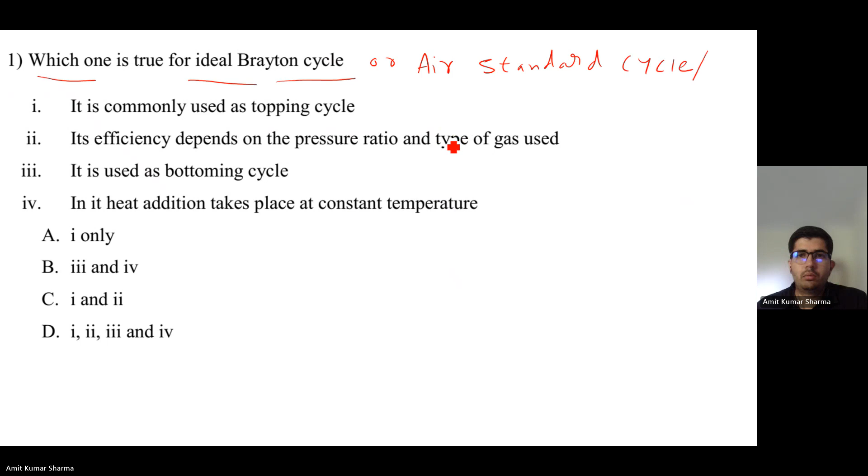The ideal Brayton cycle is also called the air standard cycle or Joule cycle. Maybe based on this you can recall it. Try to go through all the options. Try to remember the T-S diagram of the ideal Brayton cycle and in what way we can use it.

Okay, let's start with the solution. The correct option is option C, so the first and second statements are correct. The first statement is that it is commonly used as a topping cycle. Yes, it's commonly used as a topping cycle because in the ideal Brayton cycle, it's a topping cycle. The waste heat, that is the heat rejected, we use in some bottoming cycle to produce power. Like in a combined cycle, we can use gas and steam turbine combined cycle. The gas turbine cycle will be based on the ideal Brayton cycle, and the exhaust heat from the Brayton cycle will be used to generate steam, and that steam will be used in the steam cycle or Rankine cycle. So directly from the definition or basic concept, we know that the ideal Brayton cycle is commonly used as a topping cycle.

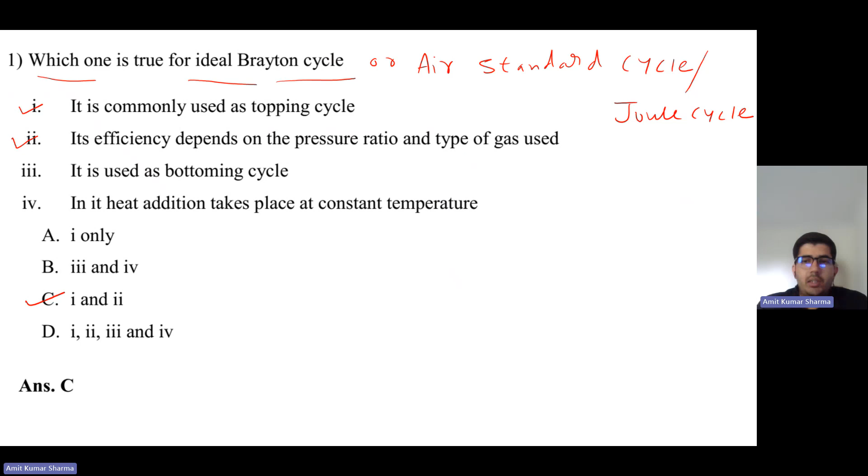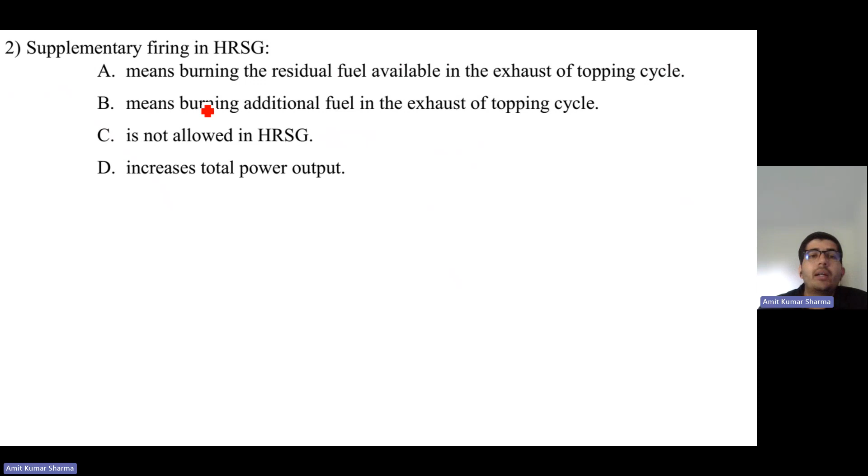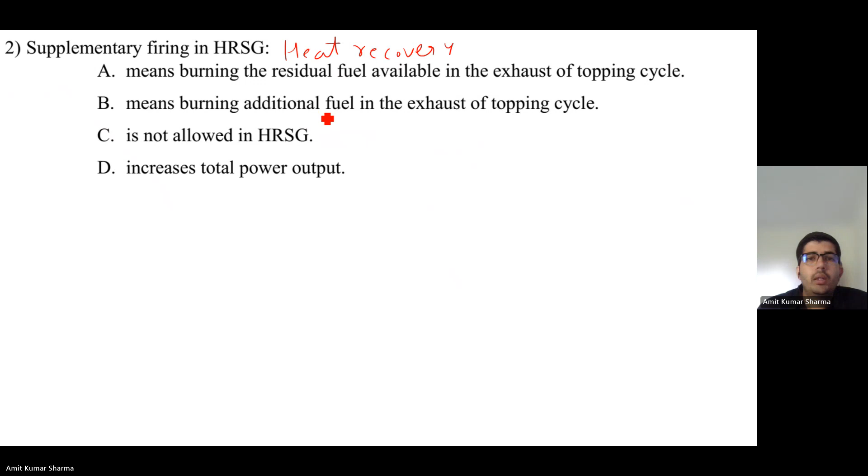Let's come to question number 2: supplementary firing in HRSG. HRSG stands for heat recovery steam generator. Let's write the full form - heat recovery steam generator.

What does supplementary firing in HRSG mean? We have four options. Option A means burning the residual fuel available in the exhaust of the topping cycle, option B means burning additional fuel in the exhaust of the topping cycle. Option C says it is not allowed in HRSG, and option D says it increases total power output. We have to select which options are correct for HRSG. Take 2 minutes and try to answer.

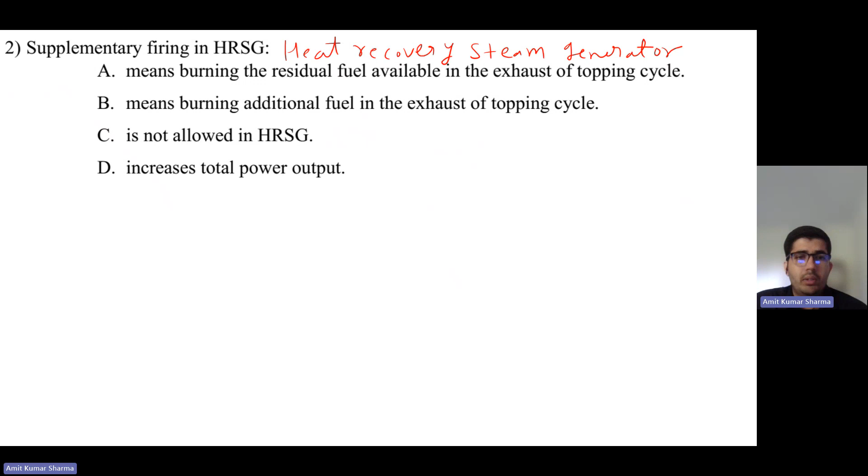Now let's come to option C, which says it is not allowed in HRSG. No, that is not the case, because supplementary firing is allowed in the heat recovery steam generator, since it is essential if we want more power output. Suppose the topping cycle exhaust heat is not sufficient to run the bottoming cycle properly - then we need some supplementary firing, so it is allowed. And supplementary firing in HRSG increases total power output, so D also seems correct.

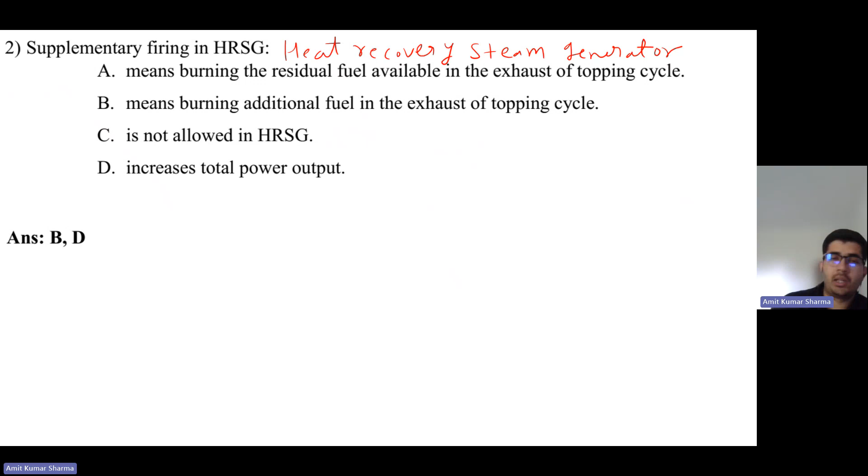So the correct options are B and D. Supplementary firing in HRSG means burning additional fuel in the exhaust of the topping cycle, and it increases total power output.

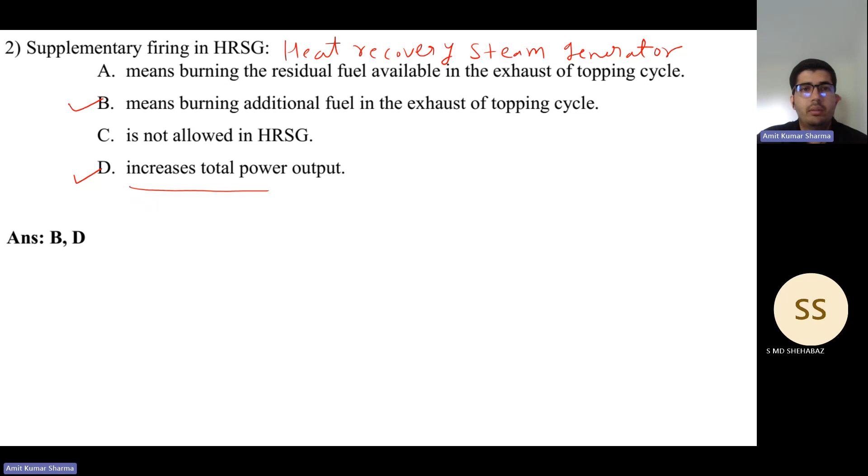I think someone has joined the session. Are you able to see the slides and can you hear my voice? Yes sir, I'm able to hear you. Okay, everything is coming through fine. I think today it's only you and me - maybe, let's see. I think it's a rescheduled session, so maybe others forgot to join.

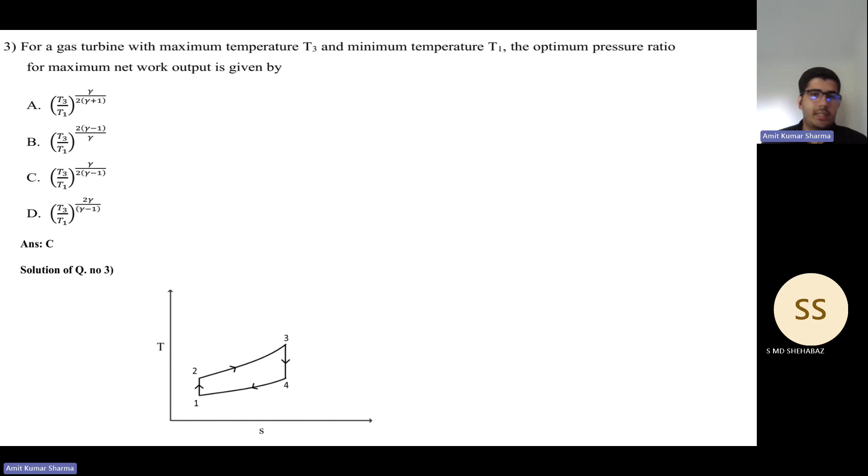So let's see, first we should draw the TS diagram. So the TS diagram we can draw here, you can see it. The process goes 1 to 2, 2 to 3, 3 to 4, and 4 to 1. T1 is the minimum temperature and T3 is the maximum temperature. Now we have to find the maximum work output.

So for the ideal Brayton cycle, the pressure ratio Rp is given by Rp to the power gamma minus 1 upon gamma equals to T2 upon T1, equals to T3 upon T4.

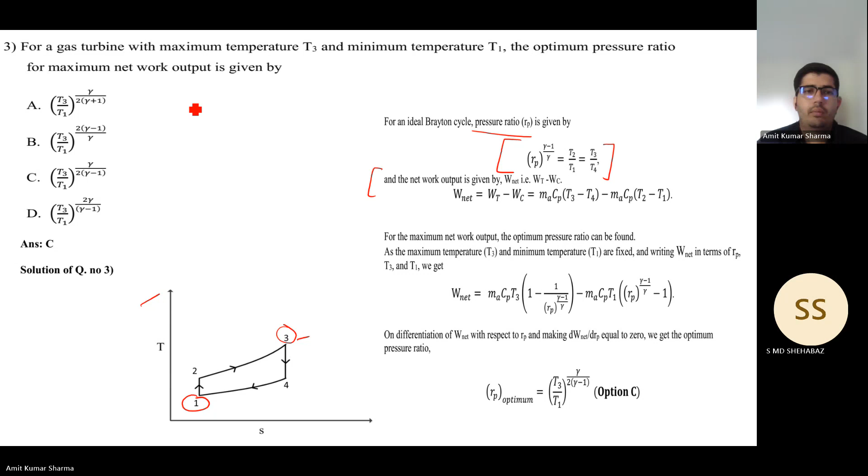So the net work output, W net, is W turbine minus W compressor. In the Brayton cycle, the compressor has a significant work input because we are compressing the air. Earlier in steam turbines we used pumps, which didn't require much work, so for ease of calculation we sometimes neglected that work. But in actual gas turbines, we have to consider the compressor work also. So the net work will be W turbine minus W compressor.

So WT minus WC. For WT: mass flow rate of air (MA), specific heat CP, and T3 minus T4. So W turbine will be MA CP (T3 minus T4), minus for compressor it will be MA CP (T2 minus T1). So this will be the formula for the net work output.

Now we are given that we have to find the maximum net work output. For maximum, we can apply some conditions. For the maximum net work output, the optimum pressure ratio can be found as the maximum temperature T3 and minimum temperature T1 are fixed. So we have fixed T3 and T1, and now we have to write W net in terms of Rp, T3 and T1. So we have to replace T2 and T4.

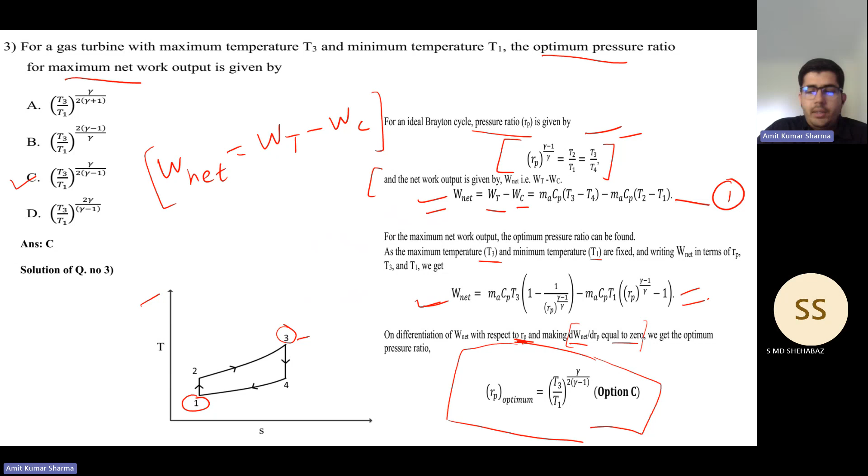Okay, let's come to question number 4. The efficiency of topping and bottoming cycle of a combined cycle power plant are eta1 and eta2 respectively. The correct expression of efficiency for the combined cycle is asked for. Maybe more than one option can be correct. Try to remember the class notes and try to answer this question.

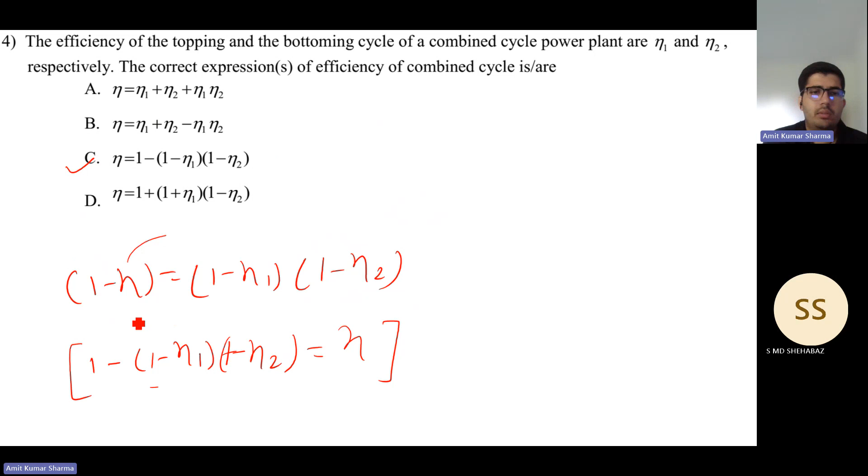So this will be the efficiency of a combined cycle. Check the options, and we can find option C has a similar term, so it's correct. Now again try to solve these two terms, then we can find out.

So that eta will be 1 minus a larger bracket. I multiply this 1 to 1 and 1 to eta 2, and this eta 1 to 1 and again eta 1 to eta 2. So we will get 1 minus eta 2 minus eta 1 and plus eta 1 eta 2.

So again solve the bracket. Outside we are having a minus sign, so if you change the signs inside, it will be 1 minus 1 plus eta 2 plus eta 1 minus eta 1 eta 2. So this will cancel out, and the efficiency will be eta 1 plus eta 2 minus eta 1 and eta 2.

You can check with the options. We can find the similar term in option number B, so B is correct. So the correct options will be option B and C.

So the efficiency of the topping and bottoming cycle of a combined cycle power plant, having efficiencies of eta 1 and eta 2, can be represented as a single efficiency like 1 minus eta 1 into 1 minus eta 2, and eta 1 plus eta 2 minus eta 1 eta 2. Option B and C are correct.

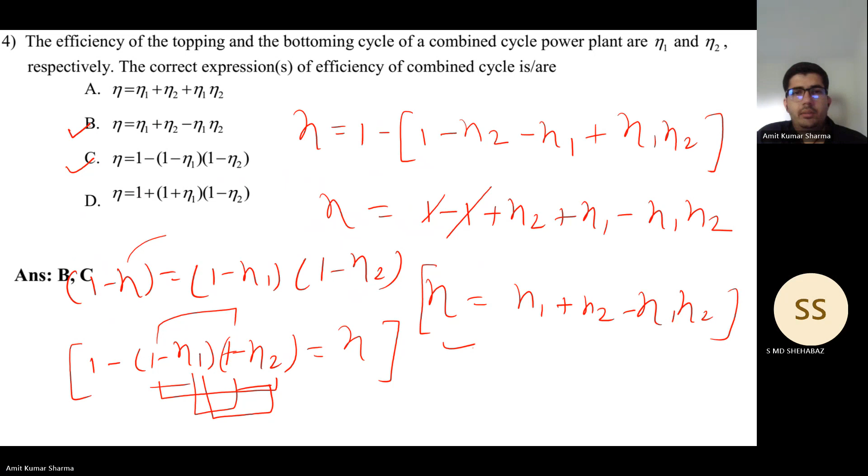Okay, let's come to the next question. Question number 5: in a gas turbine, the atmospheric air is compressed to 6 atmosphere. The maximum and minimum cycle temperatures are 1200 Kelvin and 300 Kelvin. So T3 and T1 are given. Find the ratio of the gas turbine cycle efficiency to the Carnot cycle efficiency.

We have to find out the gas turbine efficiency and the ratio of gas turbine efficiency and Carnot cycle efficiency. I think you can easily calculate the Carnot efficiency since you know the maximum and minimum temperature. The ambient is at 1 atmosphere and 300 Kelvin, so the ambient condition is given, and gamma is also given. Now find the gas turbine efficiency and the Carnot efficiency, then find the ratio. So take 3 minutes to solve this question and then we will discuss.

Try to recall the formulas, then I think you will be able to answer it.

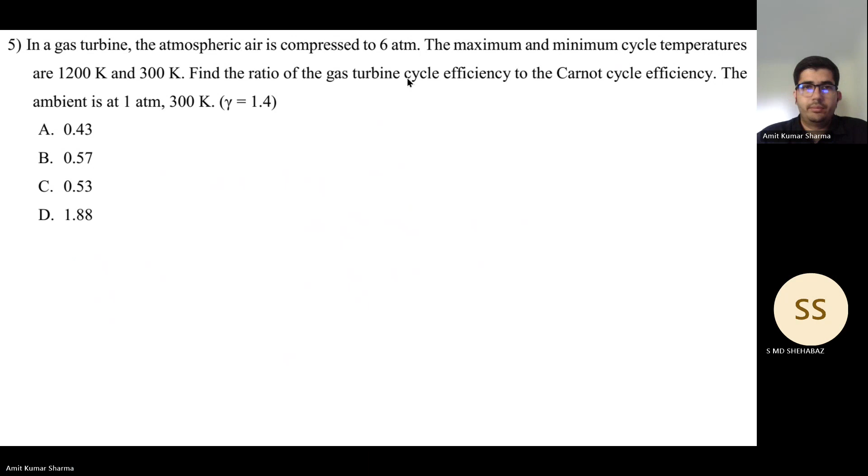Okay, so let's start with the solution. As we can see, the Carnot efficiency is 1 minus T min upon T max. We have given the T minimum and maximum temperatures, so the Carnot efficiency will be...

1 minus T minimum, which is 300 as given in the question, and T max is 1200. So 1 minus 300 upon 1200, you will get 0.75, you can say 75%.

So this will be the Carnot efficiency. Now the Brayton cycle efficiency, as we also know the formula: 1 minus 1 upon Rp to the power gamma minus 1 upon gamma, where Rp is the compression ratio, and Rp will be P2 upon P1. We are given the maximum pressure is 6 atmosphere from the ambient 1 atmosphere.

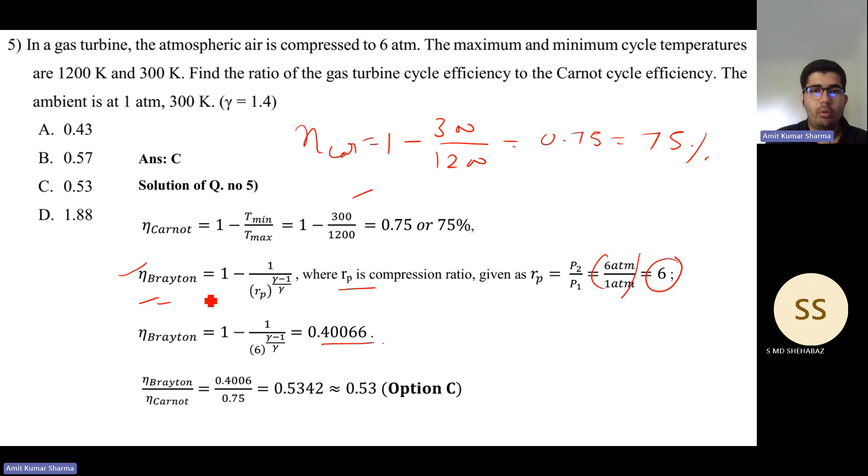So the question asked for the ratio of Brayton cycle and Carnot cycle efficiency. Now we know both efficiencies, so we can easily find the ratio: 0.40066 upon 0.75. After solving, it comes to 0.5342, which is approximately equal to 0.53.

So the correct answer is option C. Try to remember this formula, because every time it will be difficult to derive these formulas. So try to understand it and remember it — it will be easy for you to solve the numericals then.

Any doubt? Okay, let's come to the next question.

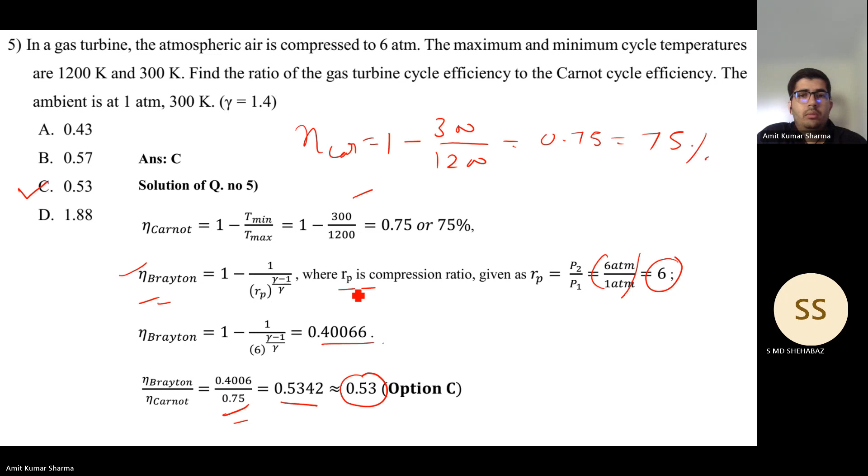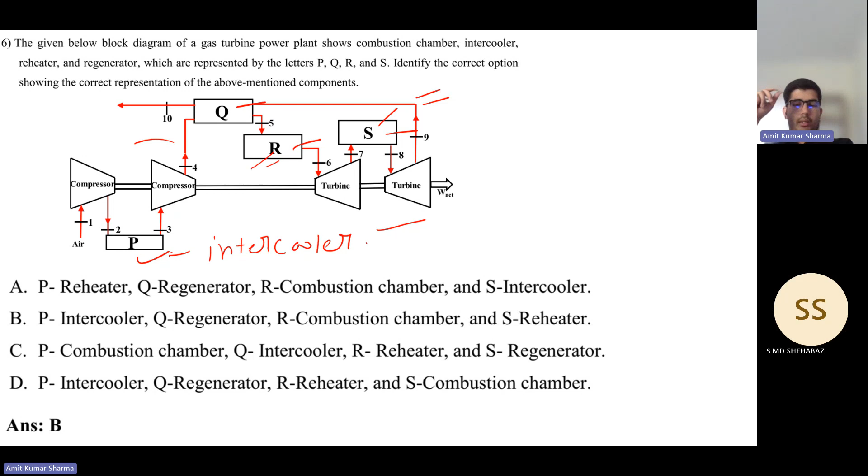Okay, let's go to the next question.

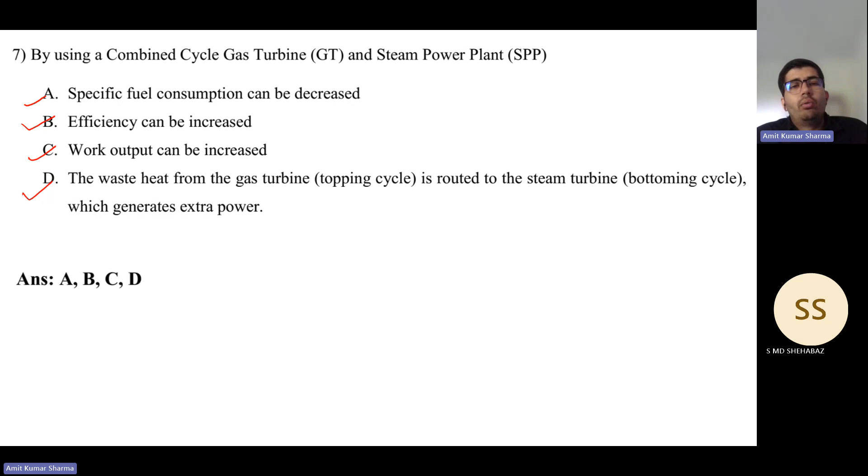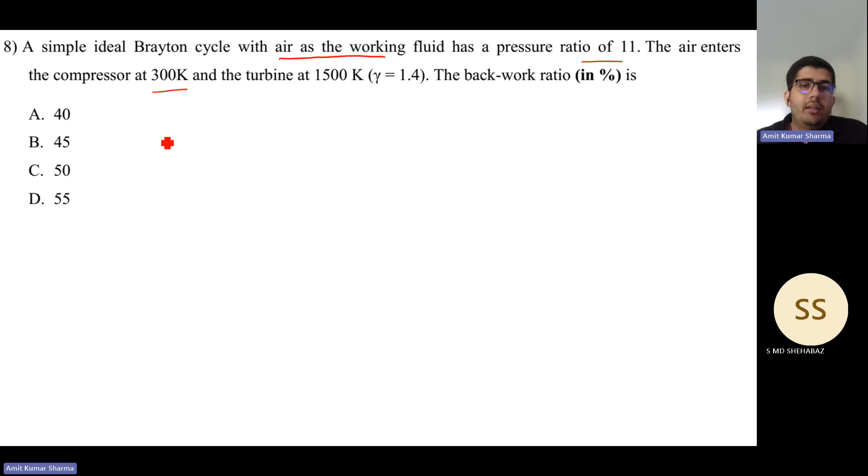Let's come to the next question. A simple ideal Brayton cycle with air as the working fluid has a pressure ratio of 11. The air enters the compressor at 300 Kelvin and the turbine at 1500 Kelvin, and gamma equals 1.4. Find the back work ratio in percentage.

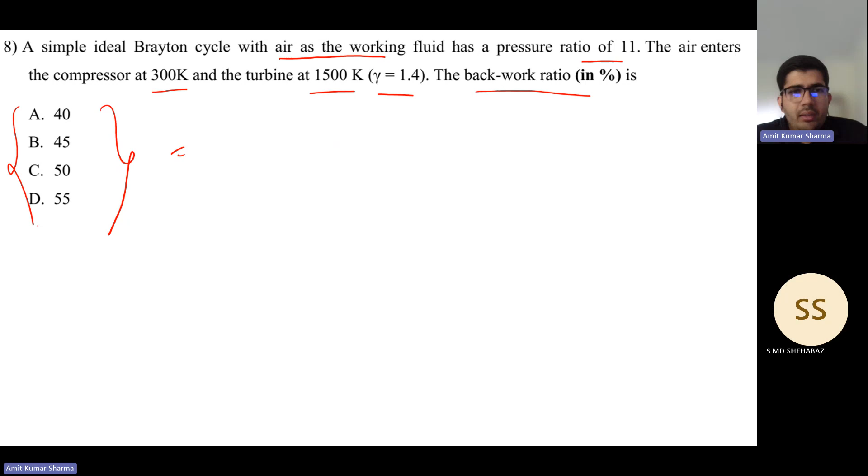Take 2 to 3 minutes and try to answer this question. Just try to recall the basics of a Brayton cycle. Make a basic schematic, mark all the points 1, 2, 3, and 4, and try to put in these values. After that, maybe you will be able to calculate it.

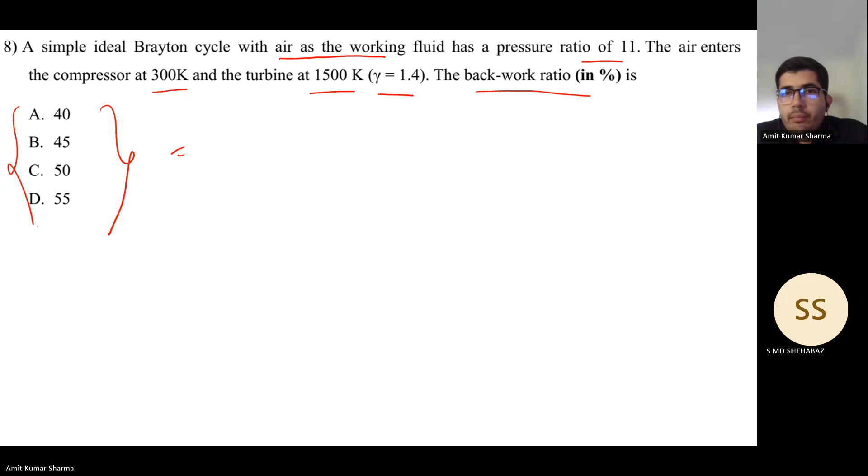So try to solve this. Do we have any answer? Okay, so first of all, whenever you have a problem based on any cycle, like Brayton cycle, Rankine cycle, any cycle, the best thing to start the solution is with a basic schematic of a TS diagram or HS diagram. So here we can draw a TS diagram.

So we have to mark the points 1, 2, 3, and 4. In this way you can see 1, 2, 3, and 4. Now, we have given that the working fluid has a pressure ratio of 11, so RP is given as 11.

So the RP will give us T2 upon T1. You know T2 upon T1 equals RP to the power of gamma minus 1 upon gamma. We have given gamma as 1.4 and RP as 11. Putting these values, T2 upon T1 equals RP to the power gamma minus 1 upon gamma equals 1.9839.

Now P2 equals P3, since heat addition takes place at constant pressure, and P1 equals P4 because heat rejection is also at constant pressure. So P2 equals P3 and P1 equals P4. Now put the value of this.

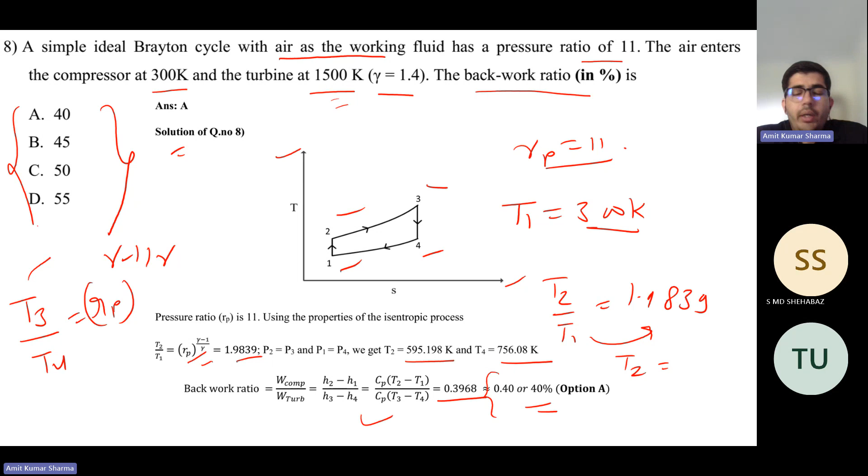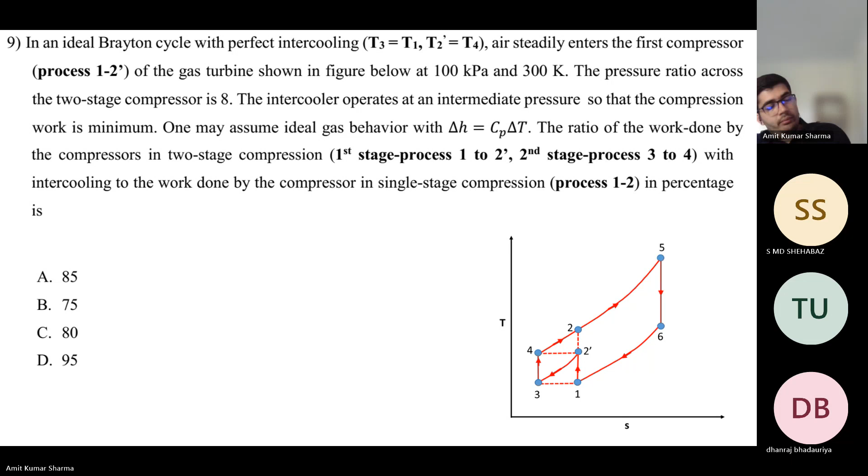It's quite a big question, take 3 minutes. First of all, you should see the diagram very carefully. You should read the question carefully. After that, you should start the solution.

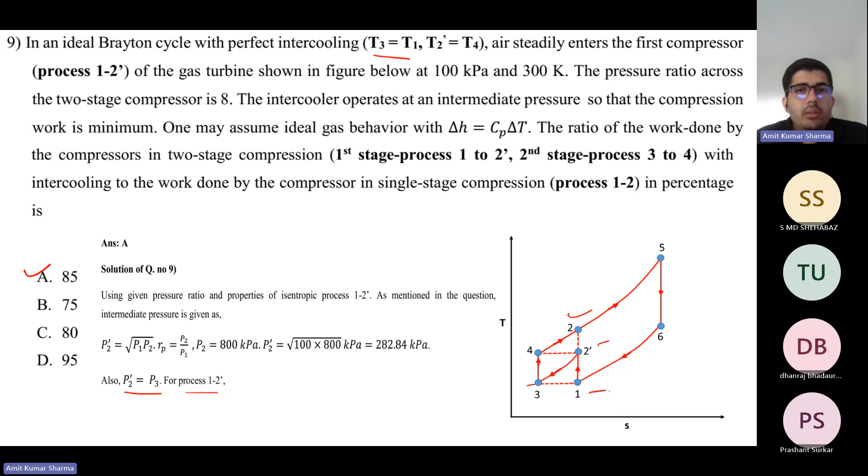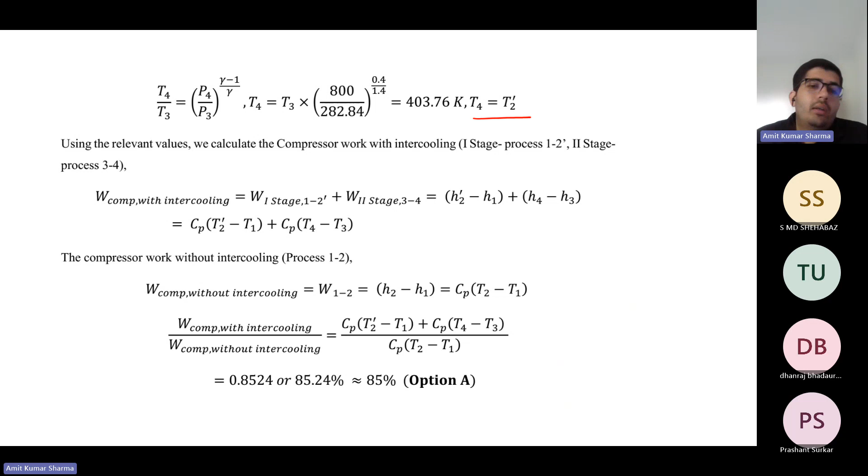So basically, whenever you're trying to solve this type of question, try to find out the values of the points which are required. In this case, we require the points for the compressors because we need to know the ratio of compressor work with intercooling and without intercooling. After that, we can solve it.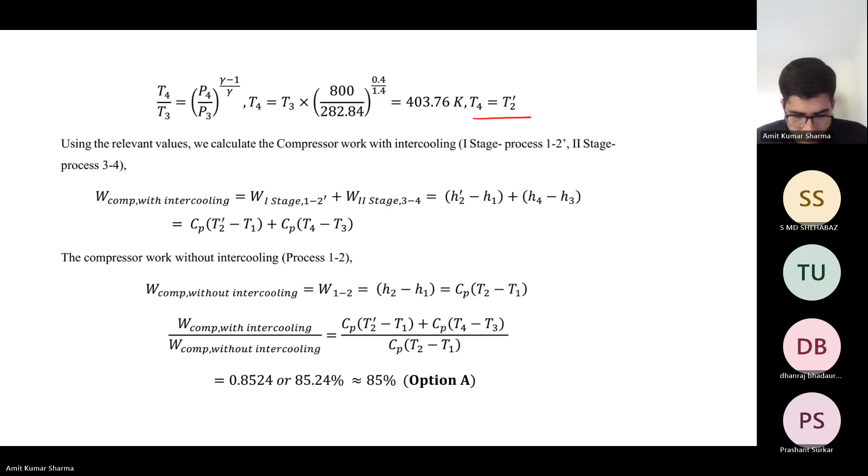Okay, now let's come to the next question. The gas turbine section of a combined gas steam power plant has a pressure ratio of 15. Air enters the compressor at 300 Kelvin and 1 atmosphere at a rate of 13 kg per second, and is heated to 1500 Kelvin in the combustion chamber. The combustion gas leaving the gas turbine is used to heat steam to 400 degrees at 10 megapascal in a heat exchanger. The combustion gases leave the heat exchanger at 420 Kelvin. The steam leaving the turbine is condensed at 15 kilopascal.

So the figure is given here, and the tables are given in the discussion on the next page. First, you should see the figure correctly.

From here you can see the air input going into the compressor. From the compressor it comes out at state 2. From state 2, it goes to the combustion chamber, coming out at state 3. At state 3, it goes to the gas turbine, and at the gas turbine it comes out as state 4. From state 4, it goes into a heat exchanger where it exchanges heat with the bottoming cycle. In the bottoming cycle, it gives heat for steam generation. The generated steam at state 6 goes to the steam turbine, then condenser, then pump, and back again. So this is the topping cycle, and this is the bottoming cycle.

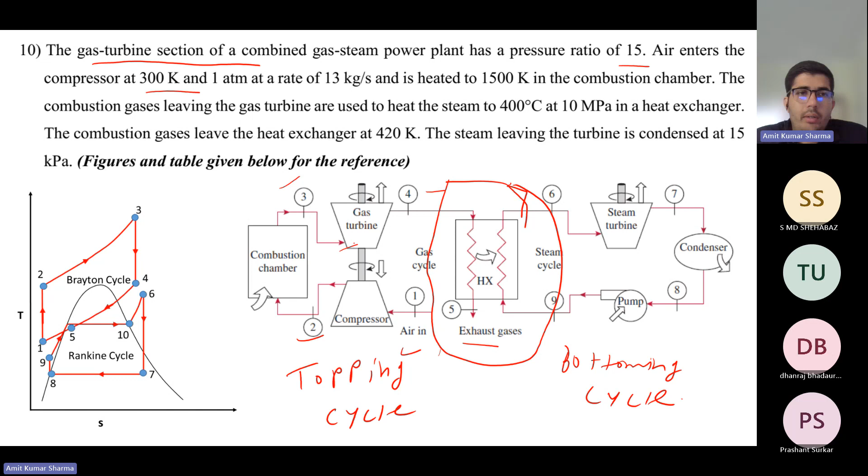Sir, can you go back the slide? The answer, sir, this answer one, sir. Mass flow rate for which is calculated, steam for steam. Okay, let me. Yeah, yeah. So mass flow rate of steam is 1.2407.

Sir, one doubt. When we apply this energy equation for this heat exchanger, suppose for example in the process, if this flow for steam, this second cycle, the bottoming cycle, if by mistake or intentionally the flow rate is reduced, whether the enthalpy will remain constant or it will go on increasing? Actually, I'm not getting you, please repeat the question. Now actually it is already value is fixed, means the pressure, temperature, and enthalpy is okay, because pressure, temperature is fixed for the topping or bottoming cycle, and then we are getting the mass flow rate for steam or for air. But sir, question is, suppose this topping cycle is fixed and we are getting that waste heat recovery from, or installing bottoming cycle, right sir? Right, so suppose when after installing the bottoming cycle, the mass flow rate for this water, steam and water, if it reduces for any reason, whether this steam side, the enthalpy side, H6 H9, will it go increasing or remain fixed, or how, sir?

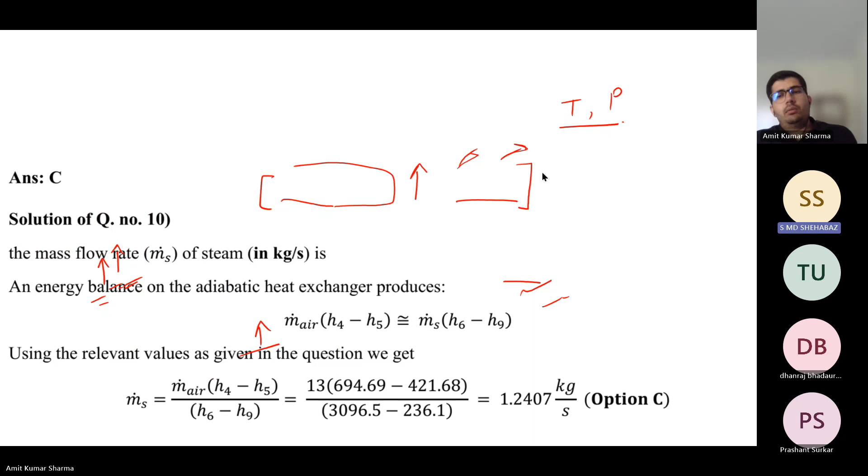Next, based on the details provided in question 10, find the thermal efficiency of the combined cycle, rounding to the nearest whole number.

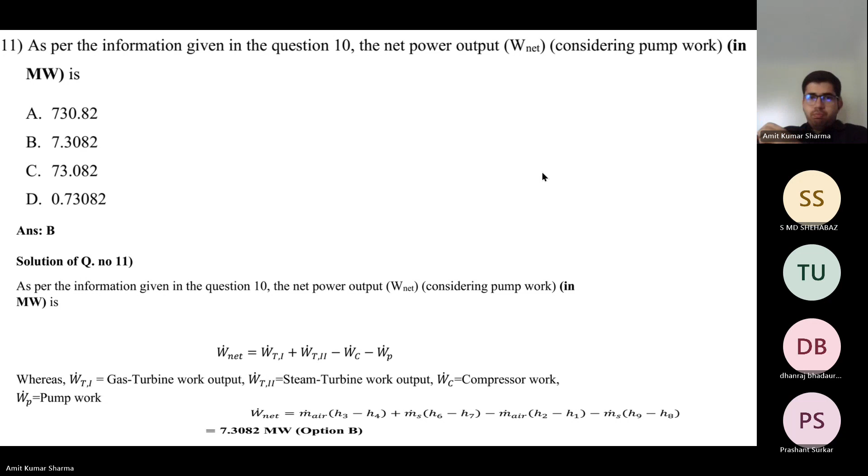So in this question we have to find the combined cycle efficiency. We've already calculated the work output of the turbines, the work output of the compressor, and all the mass flow rates. So the combined cycle efficiency is the thermal efficiency of the combined cycle. To obtain it, we evaluate the external heat addition. We know the work output, now we need the heat addition, which occurs in the combustion chamber, so we need the mass flow rate of air and the enthalpies H3 and H2.

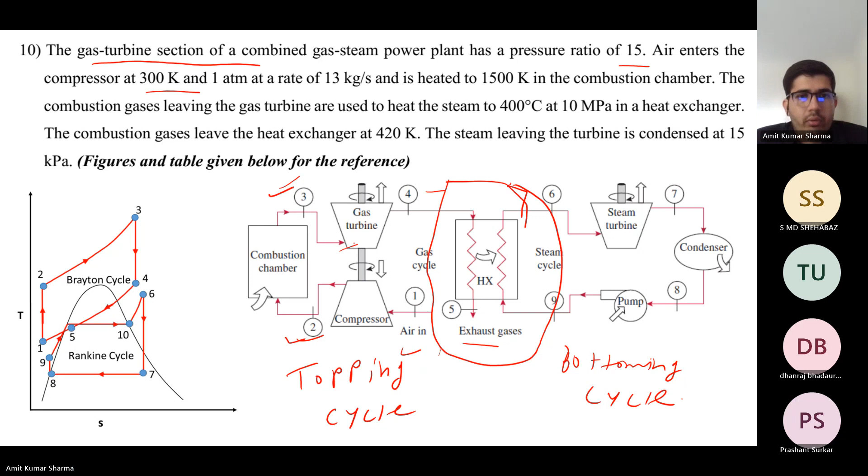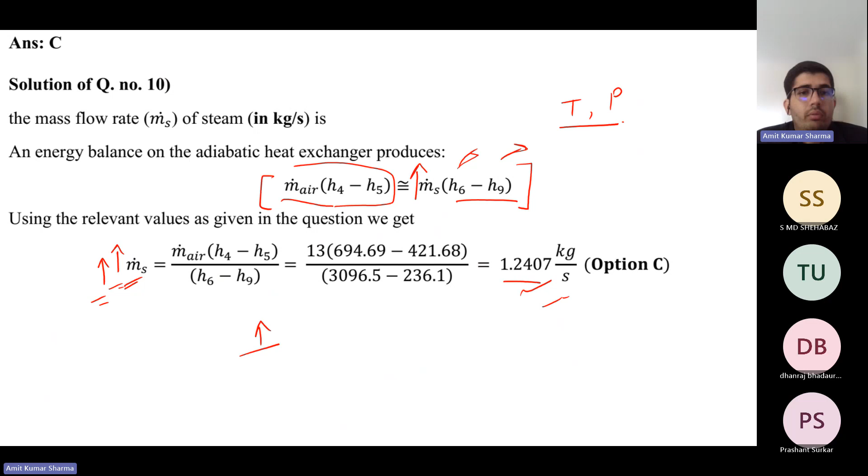From this data we can calculate the value. We're given the enthalpy of H3 and H2, so from here we can calculate. Q input will be mass flow rate of air times H3 minus H2, which comes out to 11.0896 megawatts. One point: whenever dealing in megawatts, try to keep the decimal up to 4 or 5 places.

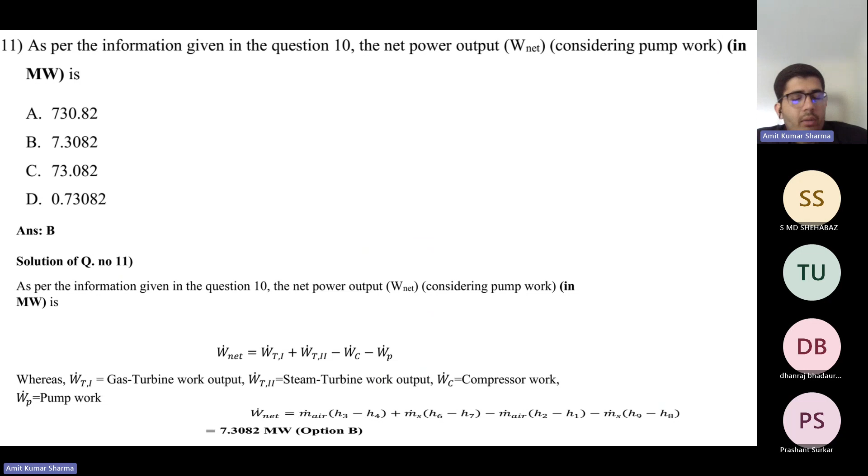The thermal efficiency of the combined cycle is W net output over Q input. This net output always considers the turbine work—both gas turbine and steam turbine—and also accounts for the pump work and compressor work. So we know the net work output and the net heat input, so the thermal efficiency of the combined cycle equals W net over Q in, which comes out to 0.6590, or about 66%. I think it's clear to everyone.

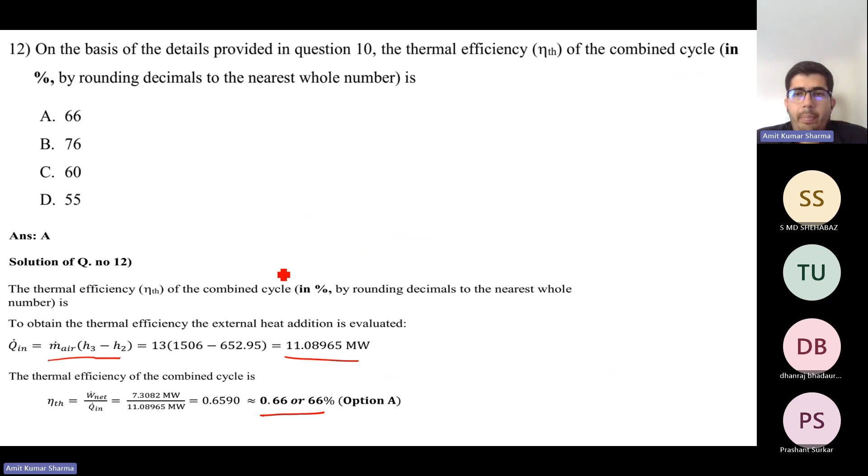Question number 13: the efficiency of HRSG can be improved using. Does anyone know the full form of HRSG? HRSG is heat recovery steam generator. Try to recall the class notes and answer the question. Take 2-3 minutes.

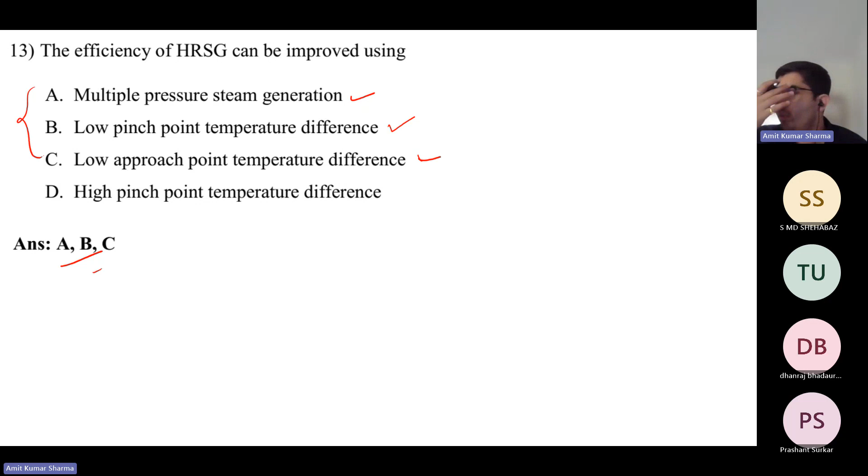Low pinch point temperature difference means we are maximizing the heat transfer from the exhaust of the topping cycle. Low approach point difference means you have to provide only a little bit of subcooling. High pinch point temperature difference is wrong, because we try to achieve the low pinch point temperature difference instead. So options A, B, and C are correct. For more detail, refer to the week 4 last class, where the professor talked in detail about HRSG. So HRSG efficiency can be improved using multiple pressure steam generation, low pinch point temperature difference, and low approach point temperature difference.

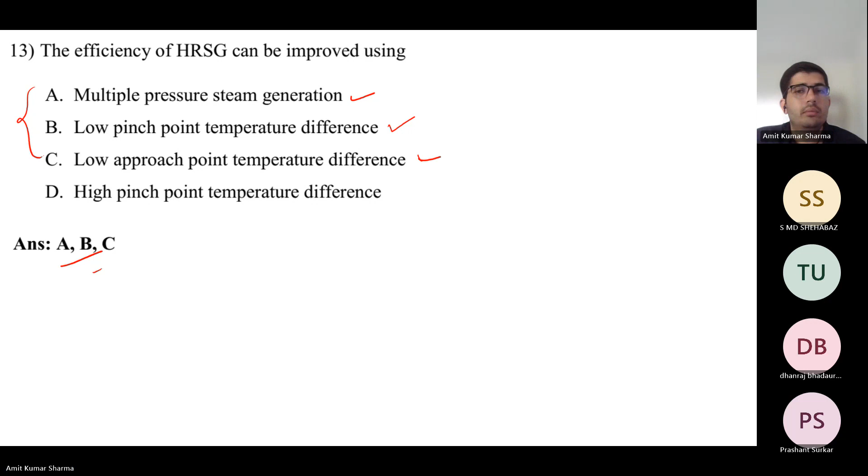Question number 14: which of the following statements are correct for the use of regeneration, intercooling, and reheating in a gas turbine cycle with given inlet conditions, pressure ratio, and maximum cycle temperature. Try to go through all the points and discuss the answer. Take 2 minutes.

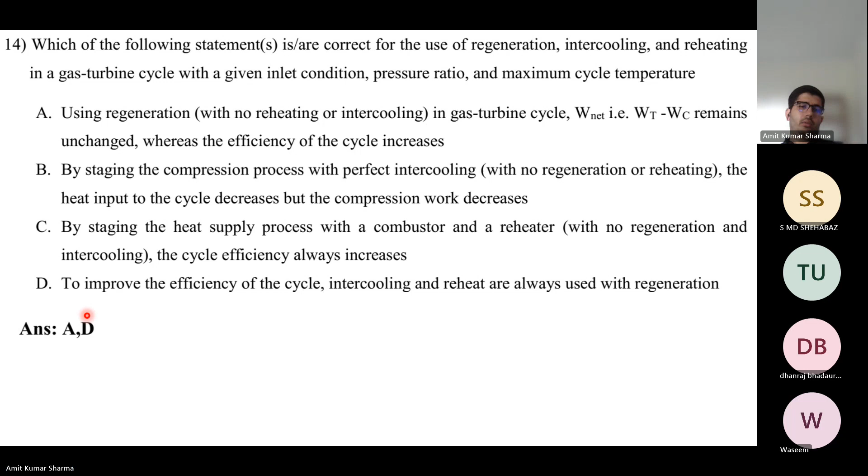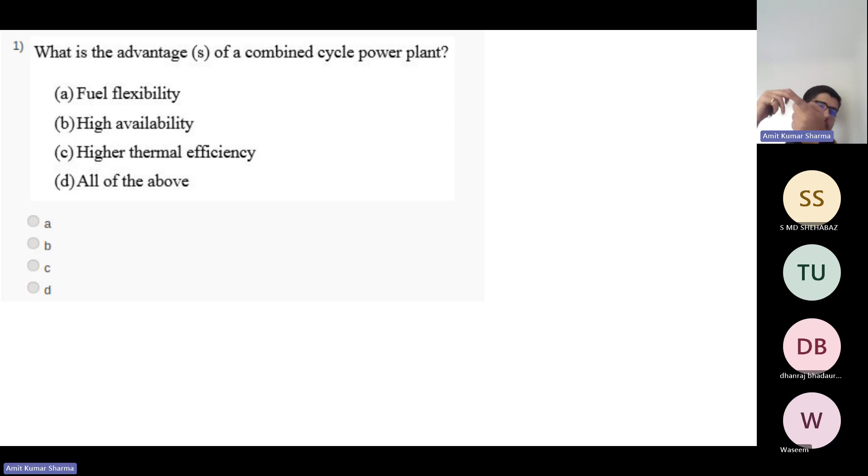Now come to the next question. What is the advantage of a combined cycle power plant? Option A is fuel flexibility, high availability, high thermal efficiency, and all of the above. Take one minute to answer. All of the above, sir. Yeah, because if we are using a combined cycle power plant, then there is fuel flexibility, high availability, and high thermal efficiency.

Identify the probable topping cycle and bottoming cycle for a combined cycle power plant, where SPP is steam power plant, TE is thermoelectric power plant, and TI is thermionic power generation. You have to combine them like topping plus bottoming cycle. So which cycle can be a topping cycle and which can be a bottoming cycle? Go through all the options and you will know the answer.

Option C, sir. Option C? Try to rethink, because you are saying steam power plant plus thermionic power, TI. The correct option is option A, because we always try to make the steam power plant the bottoming cycle, since it is easy to generate steam from exhaust heat. That's why we use the steam power plant as the bottoming cycle and all other cycles as the topping cycle, because if we have exhaust heat, it is easy to generate steam.

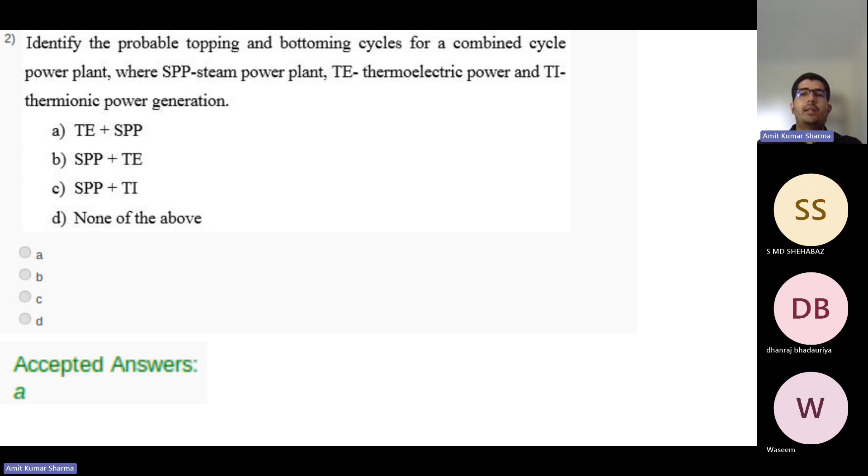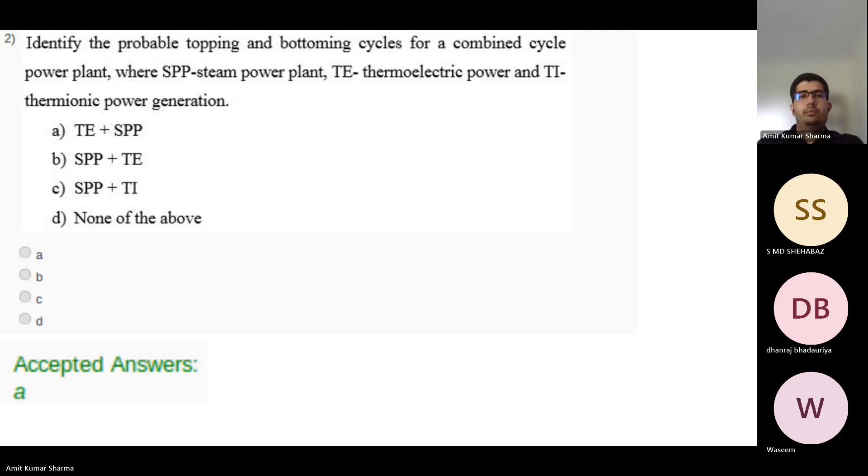And also the Rankine cycle for the steam turbine, the other pressure and temperature are also favorable in bottoming cycle, not in the topping cycle. The efficiency of a gas turbine is...

Which one is true for the ideal Brayton cycle? It is commonly used as a topping cycle. Its efficiency depends on the pressure ratio and type of gas used. It is used as a bottoming cycle. In it, heat addition takes place at constant temperature.

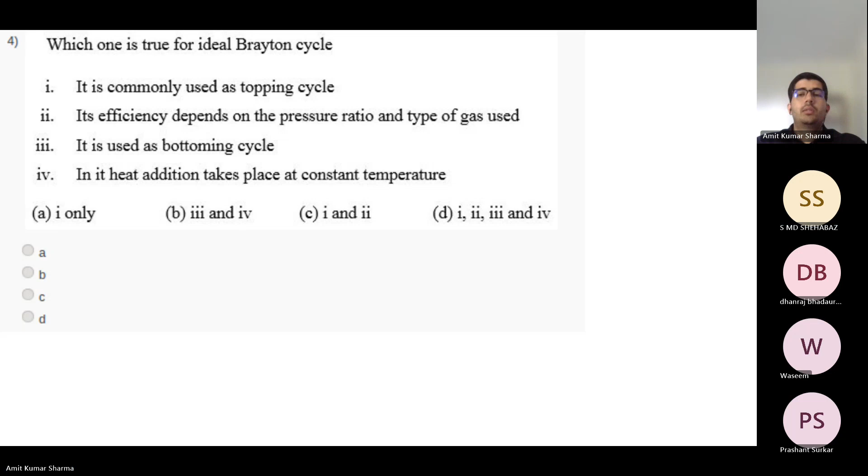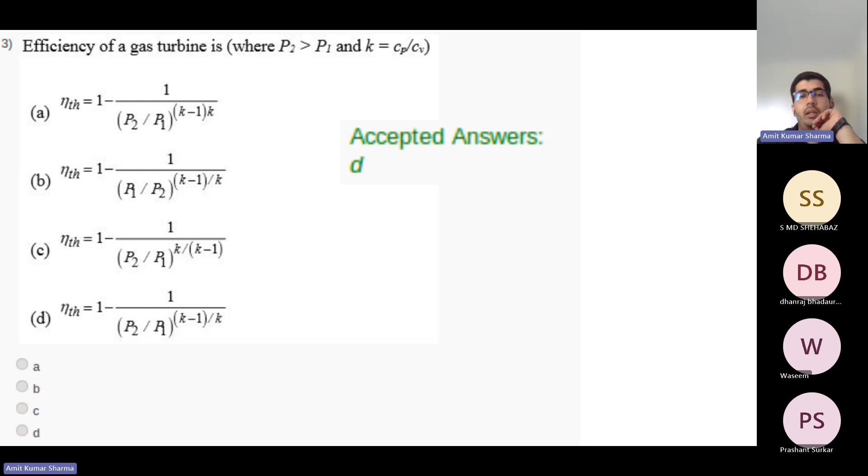Option C is correct, because it is commonly used as a topping cycle and it depends on pressure ratio and type of gas used. In the last question also, Rp, P2 upon P1, it is depending on the pressure ratio and gamma, which is the ratio of specific heats. So specific heat depends on the gas type. Basically, its efficiency depends on the pressure ratio and types of gas used.

Option 4 says heat addition takes place at constant temperature, but actually in Brayton cycle, heat addition takes place at constant pressure, not constant temperature. And option 3 says it is used as a bottoming cycle, but that's wrong because we are using the Brayton cycle as a topping cycle. So 3rd and 4th options are wrong.

Okay, identify the correct TS diagram for an ideal Brayton cycle.

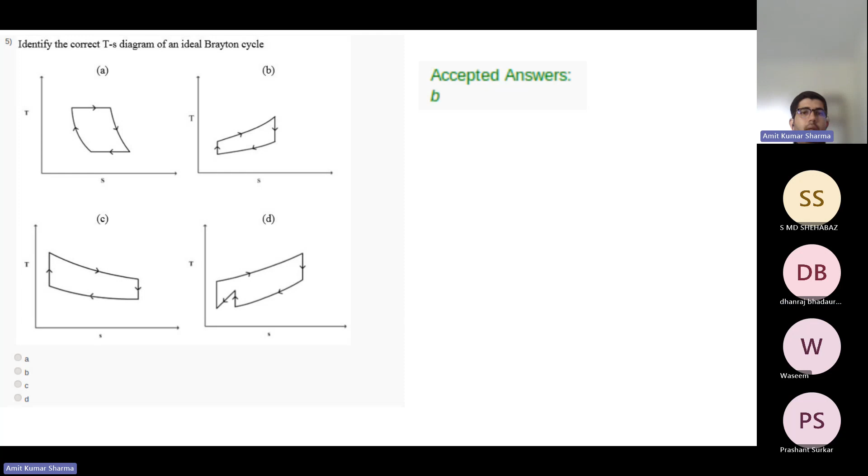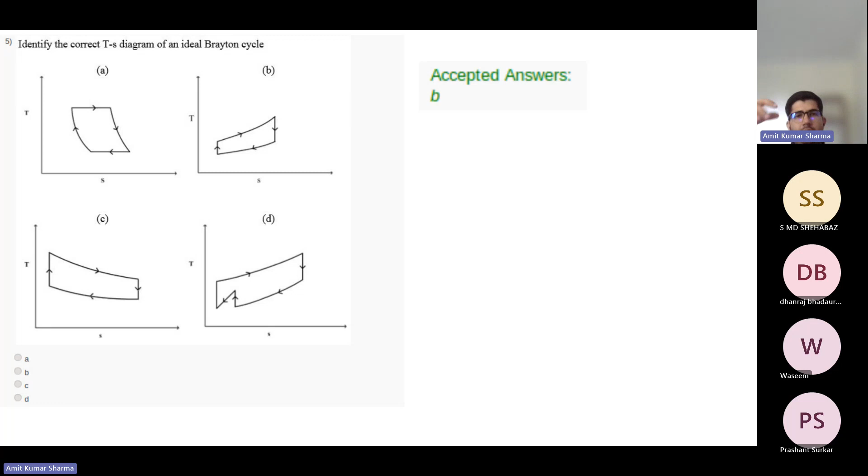Option B is correct. We know that the compression and expansion are isentropic, and the heat addition and heat rejection are constant pressure processes. So both conditions match with option B.

The difference in temperature of the exit of an economizer and the inlet of evaporator is known as approach. In the economizer, the water normally tries to exit at saturation condition, but sometimes it is not saturated, it's just below saturation. In the evaporator, the water phase is completely converted into vapor phase. So the temperature difference between the economizer exit and the evaporator inlet is known as approach.

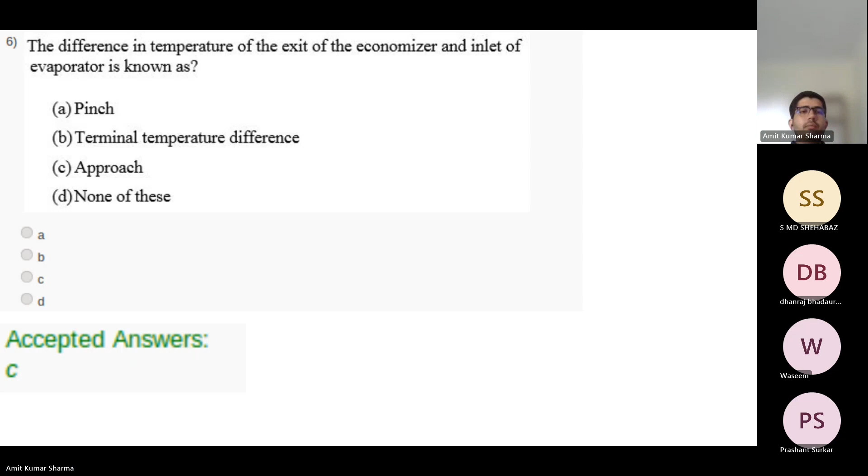The performance of heat recovery steam generator can be improved by using a low pinch point. If the pinch point is low, it means the maximum amount of heat is transferred to the cold stream, so we can achieve maximum heat recovery.

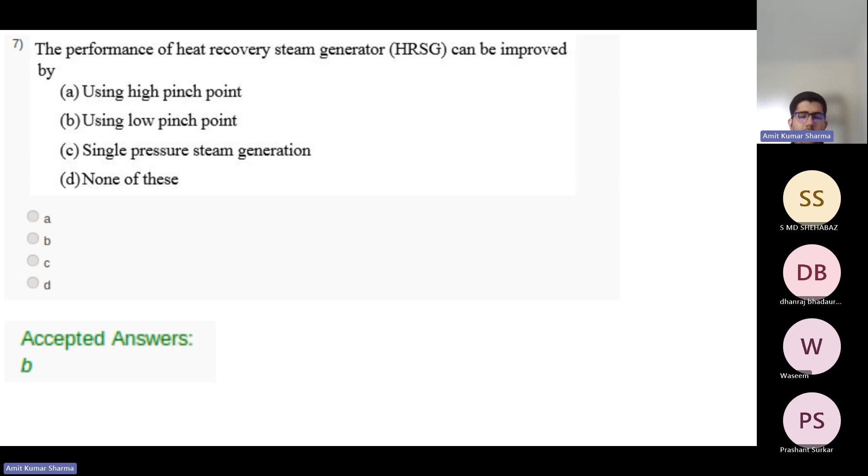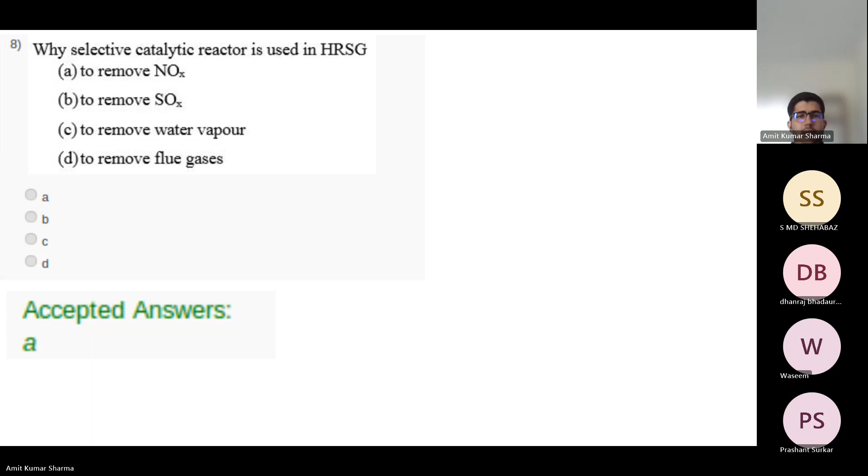Why is selective catalytic reactor used in HRSG? To remove NOx. So to remove NOx, we use the selective catalytic reactor in heat recovery steam generators.

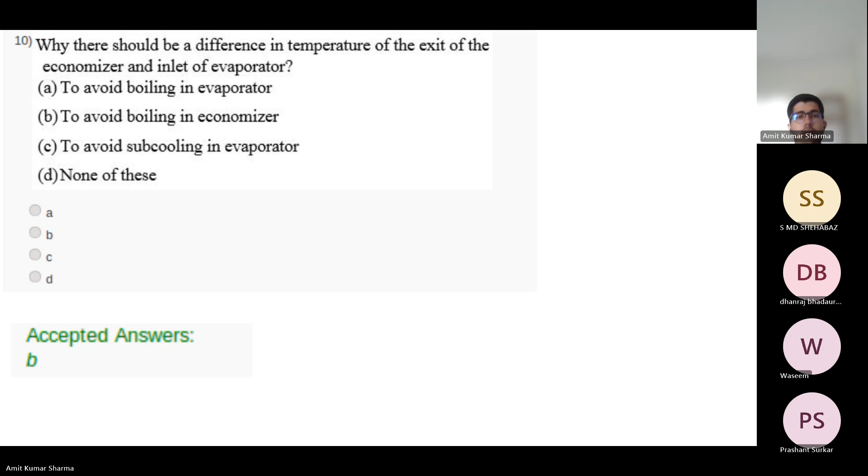Option B is correct, to avoid boiling in economizer. Efficiency of the combined cycle power plant is option C. The efficiency is eta equals eta 1 plus eta 2 minus eta 1 times eta 2.

Option B, no, it's option C. That question on avoiding boiling in the economizer is already solved. Now for the efficiency of the combined cycle power plant: it will be eta equals eta 1 plus efficiency of the bottoming cycle eta 2, minus eta 1 times eta 2.

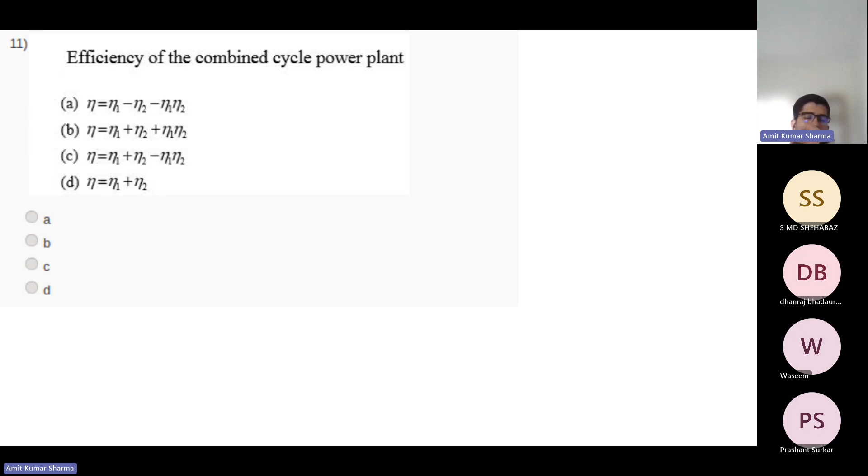Okay, maybe you can try these at your home.

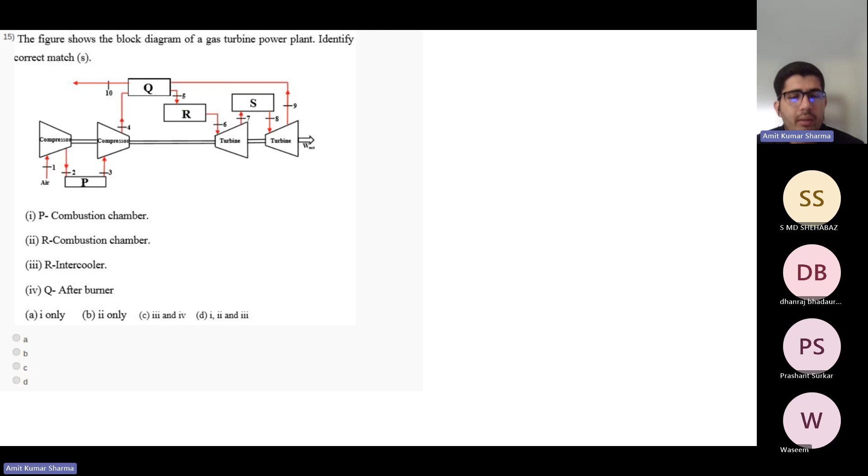And R is the combustion chamber, then what will be S? Reheater, sir. Yeah, S will be the reheater. So the correct option is option B.

Sir, one minute. Sir, here actually 2 is correct, but sir, if we think on Q, can we consider Q as an afterburner? Not logical, but if we consider the path going from 4 to 5, for that Q can be considered the afterburner.

It's not burning, it's heating. If you are burning something... okay, that is the logic. It is heating only, just heating. Afterburner, you can say, is similar to combustion chamber.

So afterburner is basically like a combustion chamber, it involves fuels and all that. So if Q is the afterburner, then there will be only one stream to Q.

But you can see there are two streams, one input and the other output. So if two streams are involved, then that cannot be an afterburner. That will be like a heat exchanger, so it's regeneration. Okay sir, thank you.

Okay, so I think it's enough for today's class.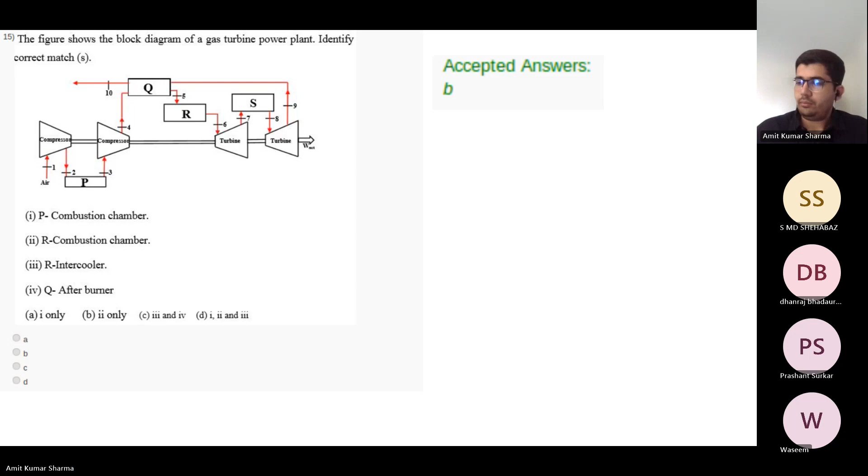So it is your homework. You can try this question at your home.

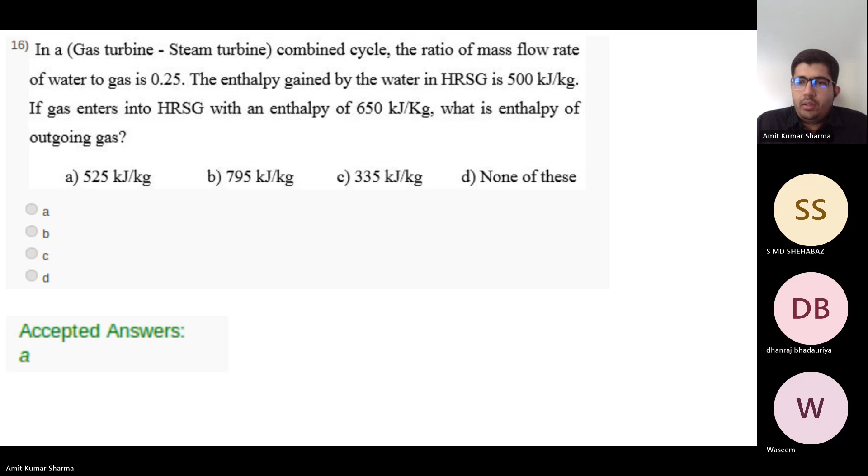So I think many of you have joined very late today. So were you aware about the class or not? Everyone, were you aware about the class? Yes, sir. So you were aware about the class.